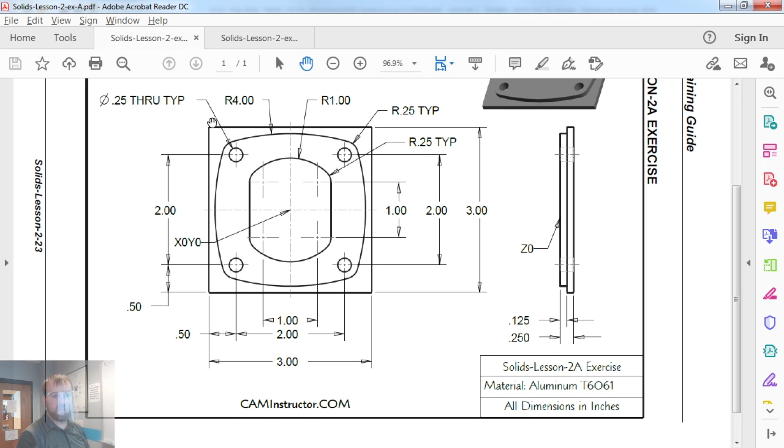Okay. So the first thing we're going to draw, essentially, is the wireframe that would be at the top of the part. Which, on this particular part, would be basically the island here. Right? The top edge of the pocket right here, and the top edge of the holes. The outside of this, this outside base, this is down .125. So we're not going to draw that yet. We're going to actually move everything down .125 and draw it to actually show depth with the wireframe.

All right. So I'm going to start out by drawing a square that is anchored to center. That is 2 inches by 2 inches. And then I'm going to draw a second square that's anchored to center. That's 1 inch by 1 inch. And that's going to give me construction points to then go in and put these radiuses all in. Okay. So I'm going to do a wireframe, create rectangle.

I'm going to go over here and click on anchor to center. And then I'm going to make sure it snaps to the origin. So origin, I turn that on with F9. Make sure it snaps to it and click. I'm just going to drag it out and click out here.

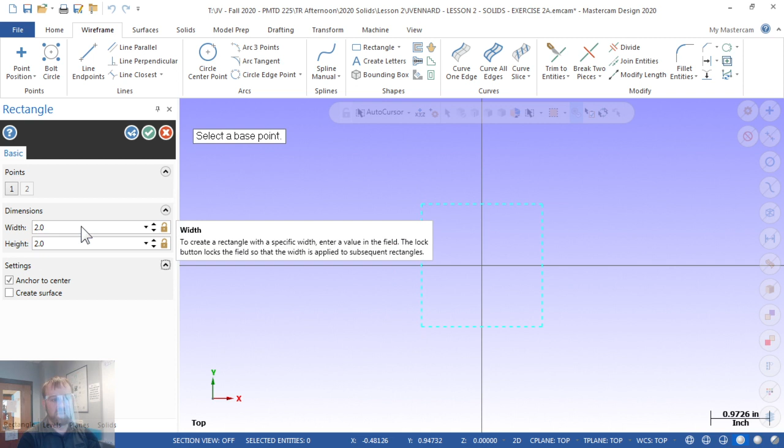Notice mine's dashed right now. I actually switched mine over to the dashed lines for construction geometry. You don't have to do that. I just did it for the other drawing that we're going to do today. It's been like that since yesterday. This one's going to be 2 by 2. I'm going to go ahead and change that back.

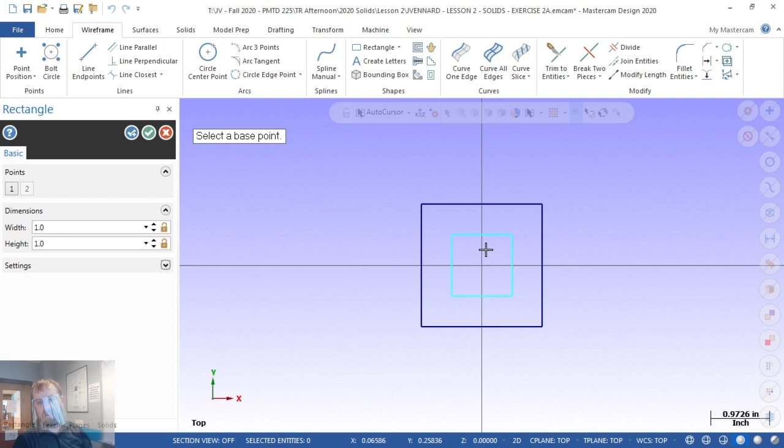Alright, once I've got that placed, I'll hit the enter key to lock it in. And then I'm going to do a second one inside of that. It's going to be 1 inch by 1 inch. And then I'll hit the check mark to lock that one in.

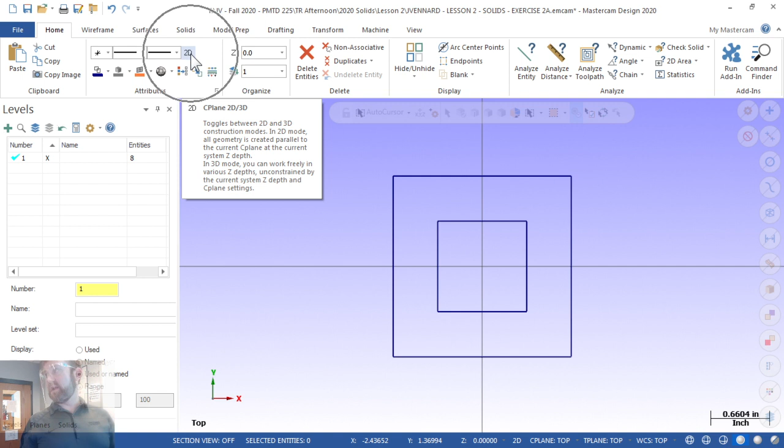One thing I do want to check, because everything I draw right now, I want to make sure it's at Z0. So up in the Home tab up here, right here you see where it says 2D, 3D. Everything I create, I want it to be at the plane that I have set. So 2D is what I'm going to want.

And then I can establish the depth right here by setting my Z depth. So if I have it in 2D right here, and I've got a depth set, everything that I draw is going to be at that depth. That's also in your right mouse button menu right here. Just by clicking on this, I can switch between three-dimensional or two-dimensional. And then I can type in whatever level I want to draw my geometry at right here.

We're going to go to wireframe again now, and we're going to create some arcs. So if I look at this drawing, I see that I've got 1/4 inch radiuses that are anchored to the corners of that 2 by 2 square. I've then got 1/4 inch radiuses that are anchored to the corners at the 1 inch by 1 inch square. So I'm basically going to create 1/4 inch radius circles.

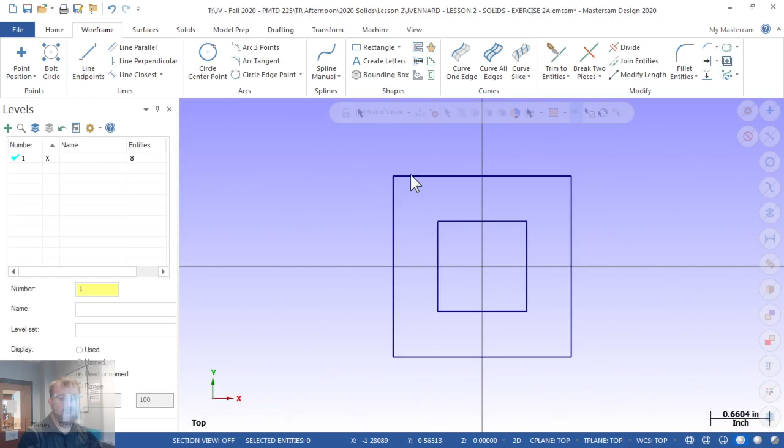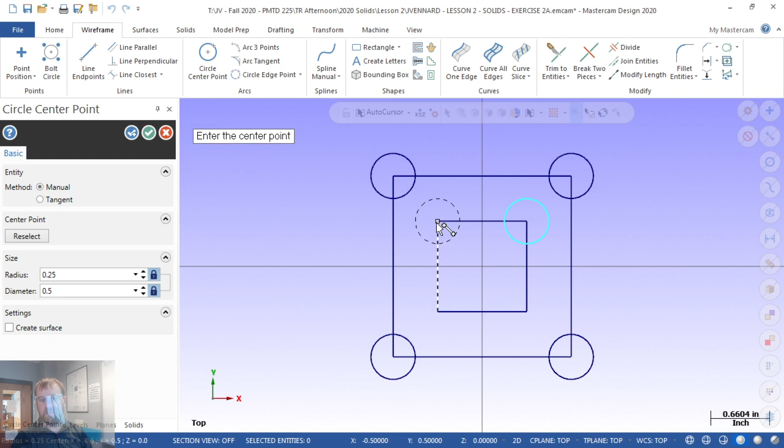So create circle center point. I'm going to make the radius 1/4 inch. I'm going to hit the lock. Then I'll place them here, here, here, and right here. Then on the inside, here, here, here, and here. Once I've created the last one that has the 1/4 inch radius, I'll go ahead and lock that.

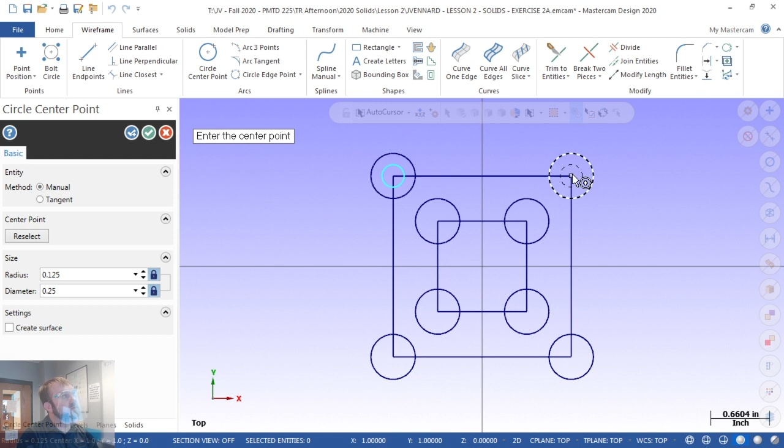And now I can go ahead and create the 1/4 inch diameter through circle geometry. So I'm going to change the diameter to 1/4 inch. And I'll put the little circles here. Okay. I got all that.

Once we get that, I'm going to hold shift down and select these 2 squares because I'm done with them. I don't need to leave my construction geometry on my screen. I'll delete it. The only time you would leave construction geometry on the screen is if you need it to be able to put a dimension there. Okay, just kind of keep that in mind for the drawing you do later. The only time I would leave my construction geometry on the screen is if I need it to put a dimension to.

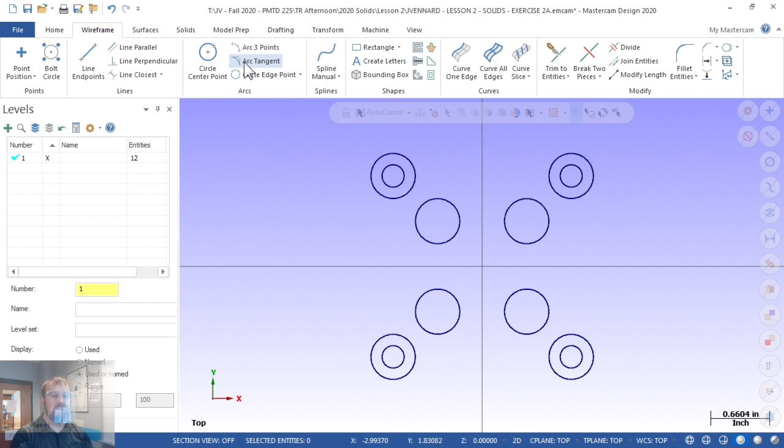Alright, now what we're going to do is put these tangent radiuses in. So these are 4 inch across the outside here. We'll go to create arc tangent. I'm going to set this to a 4-inch radius and hit the lock. I'm going to go from this circle to this one.

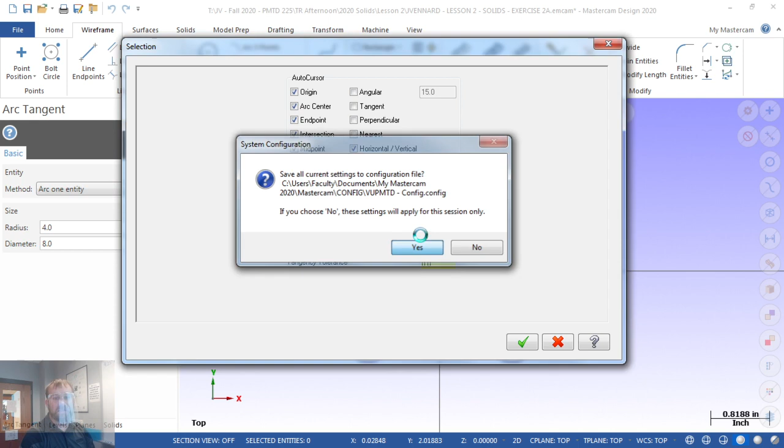Okay. Notice how mine's not snapping to it. I better check my auto cursor. Something must be shut off. Oh, I see now. I see why it's not wanting to snap to it. It's because I had it set to arc 1 entity. That needs to be 2 entities. Now, there we go. Once I went to 2 entities, that made it a lot better.

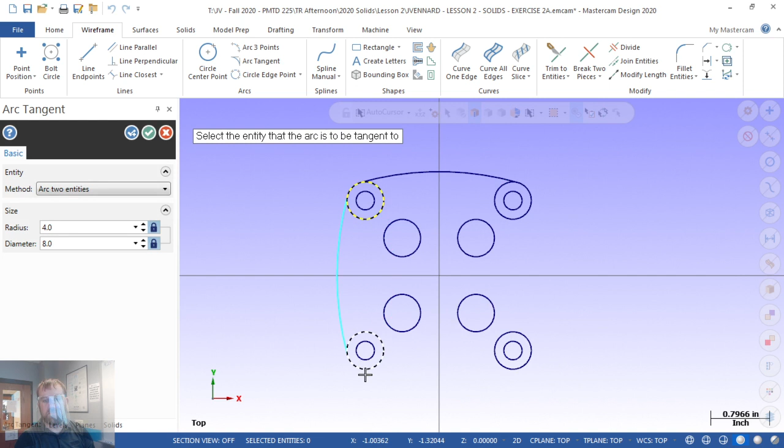I'll pick the one I want to keep. Then I'll go to the next 2. Pick the one I want to keep. Do the same thing all the way around by clicking the 2 that it's going to go tangent to, and then picking the tangent arc that you want to keep. Everybody got all those going around the outside? Okay.

We're going to do a 1-inch radius across the top and the bottom. So I'll switch this over here to 1 inch. And I'll pick these 2 here and what I want to keep. And then these 2 here and the part that I want to keep.

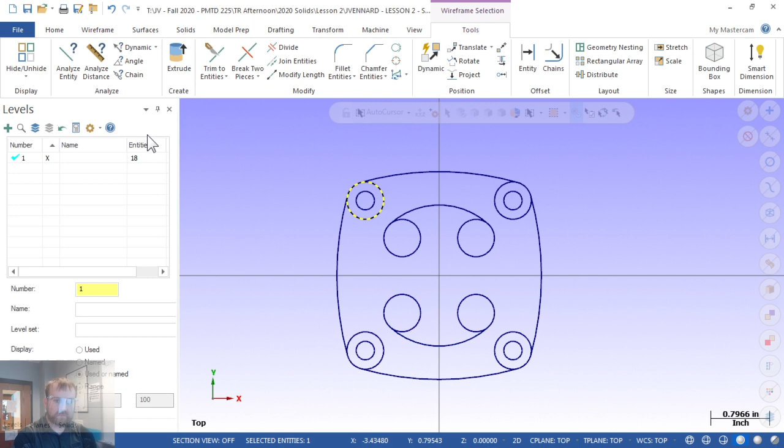Okay, now the next part, this next part here is basically going to be connecting the circles on the outside there. It's basically going to be connecting this and this, this and this. But what's important is that in your auto cursor, you have quadrants turned on, because when you go to create a line, it will let you go to the 0 point on the circle.

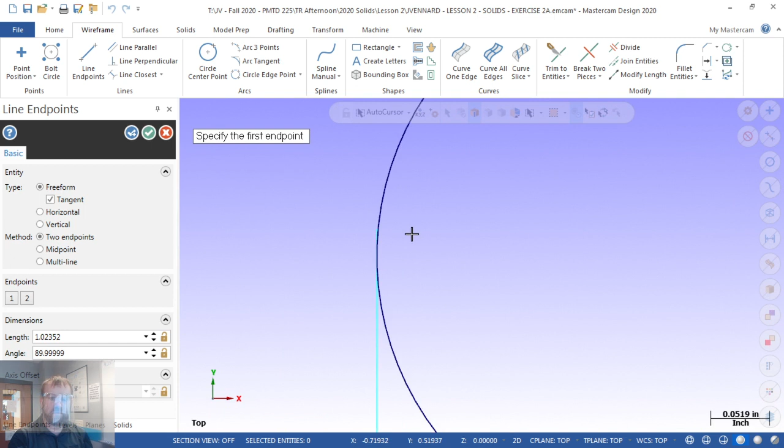But if quadrants is turned off in here, so if I don't have quadrant on right here, when I go to put my line over here at the other side of the circle, notice how it doesn't really snap to it. It's not snapping to the circle at all. And if I draw it up here and just kind of click wherever I think it is, what I end up with is a little piece of line that doesn't need to be there.

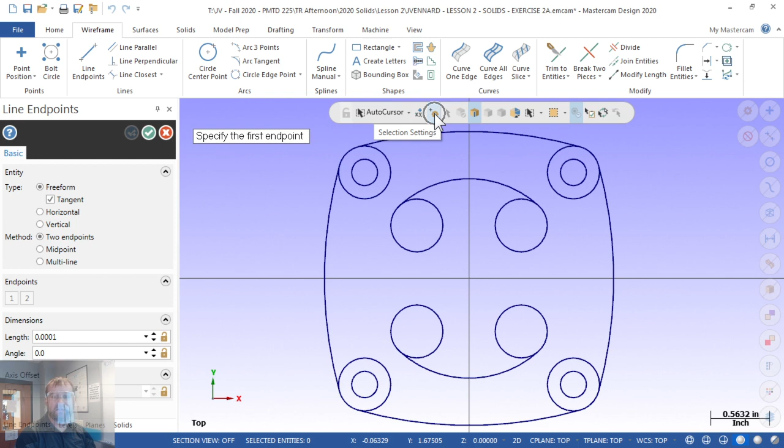And if I'm not paying a lot of attention when I go to trim it later, that can give me a lot of headaches when I go to solid model the part. That little piece of line that's overhanging there, if I don't get that trimmed out later, it can give me some headaches. So what I would recommend is just go to line endpoints, make sure in the selection settings here you turn on quadrants, and then tell it yes there.

Now it will snap to the quadrant here, and then when I come up here, you can see it snap to the quadrant right there, and that way I don't have to worry about trimming that out. And then the same thing over here. Pay attention to the auto cursor. When I see that quadrant cursor icon, I click. Come down here. When I see that icon again, I'll click.

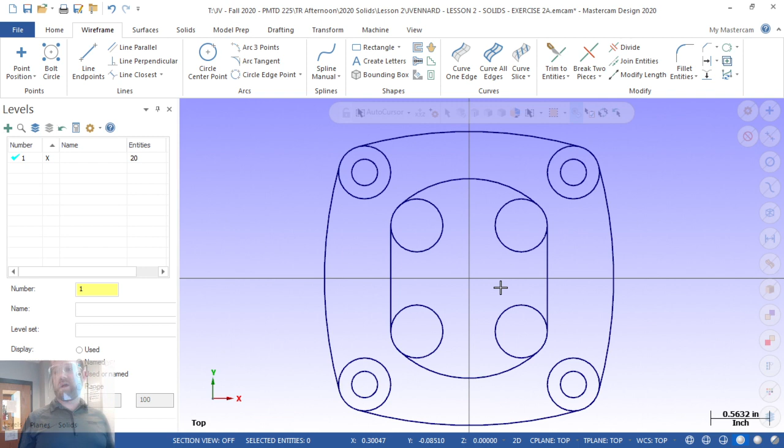So I told you the other day that I use the divide function a lot when I do my trimming. This might be one of those cases where I wouldn't. And here's why. I just want you to watch me for a second when I go to trim this. If you're not really careful when you go trim this, and I trim that out, I got rid of that circle I didn't mean to.

Or, worse yet, sometimes when you go to trim, let me see if I can get one of them to snap to it. Sometimes when I go to trim, I do that, and I think I got it all trimmed out. But if I'm not looking really closely, I end up with this little tail here hanging out. I've got to be paying attention when I trim that none of that's left behind, because when I go to chain that to make a solid out of it, if that little piece is hanging out there, or anything's hanging over, it doesn't want to extrude, doesn't want to create the solid model.

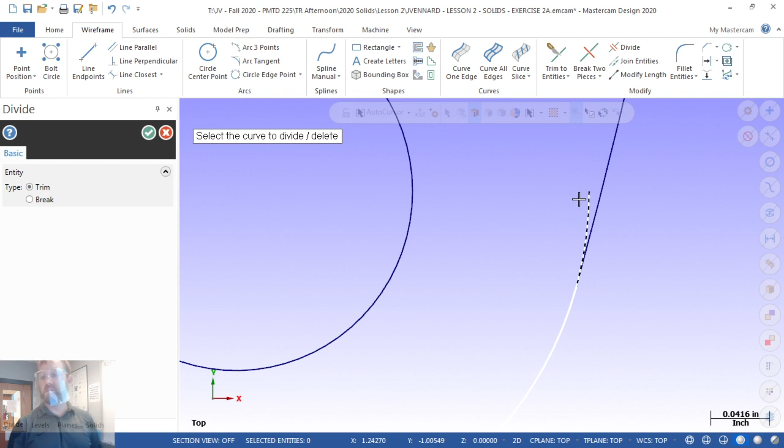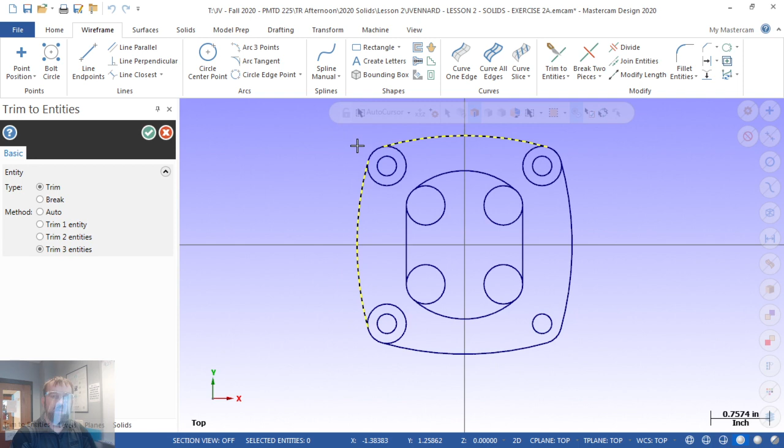So what I would recommend you use when you trim it is go to the trim to entities, and then I would do the trim 3 for this. On the trim 3 you're going to pick basically the 2 outside pieces, so I'd pick this one, and then what you want to keep between the 2 of them. So I'm going to keep this part. The trim 3 makes it to where I don't have to pay as much attention. It's going to trim this one to this one. That one's already trimmed. I didn't mean that.

So this one to this one. I keep this in between them. This line to this arc. Keep this bridge between them. This line to this arc. Keep this piece between them. I just do that all the way around. Pick the 2 outside pieces and the bridge I want to have between them. Okay.

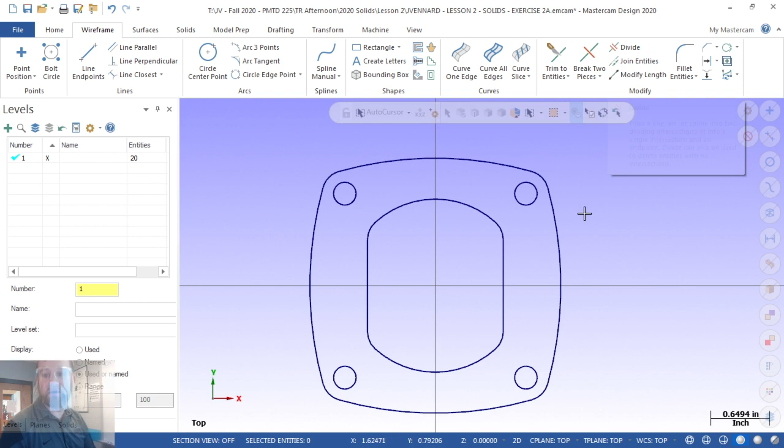A lot of the time, anytime I'm using tangent circles and stuff like that, and it's kind of hard to see, that would be my go-to on the trimming. Like I said, 9 times out of 10 I'm using the divide, but here was one of those cases where I'd probably get away from it, just because you have to really be focused and make sure you don't have anything hanging out there on you.

For some reason it's not taking out that circle. It's just taking out this. Did it? There's one, just clicking on the circle.

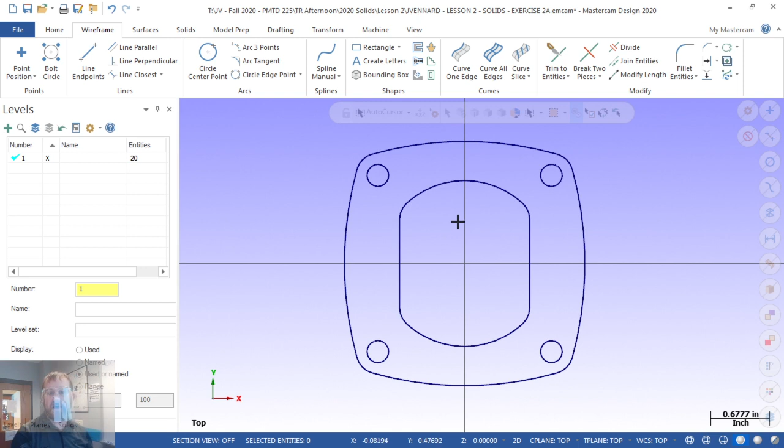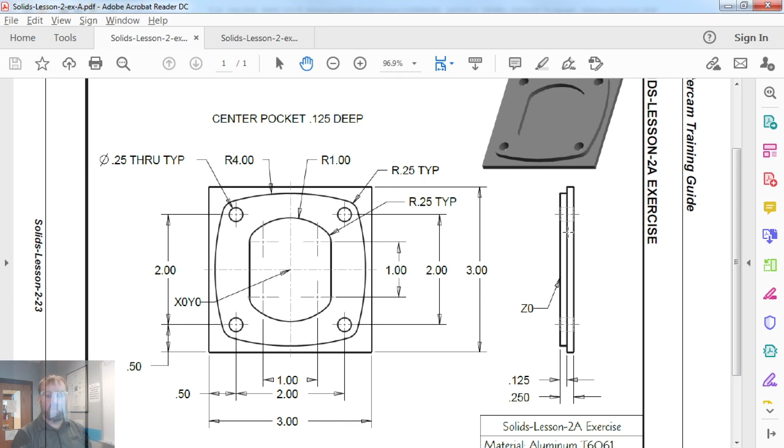Okay. Now that we've got that, we've got the top edge created. So what we're going to do now is I'm going to go to my isometric view, and I want to basically create the bottom part of this edge. The bottom part of this edge is down at 125 thousandths. I want to be able to literally look at it like a three-dimensional pencil drawing, wireframe drawing.

So I'm going to select everything that's on the screen right now. Just going to window around all of it. And then over here, there's these transform functions. These are also in the tools. There's position right here. These are transform functions right here, here, and here. These are all transform functions that are in this same menu.

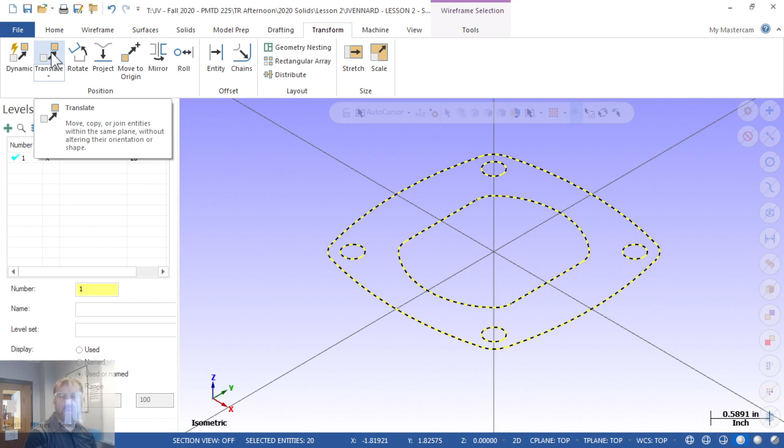The two that we're going to work with today is translate and project. Okay, so first let's go to the translate. Lets you move, copy, or join entities within the same plane without altering their orientation or shape. So basically, you can move them X, Y, and Z, but you can't spin them or expand them or do anything like that, where others you can kind of do that.

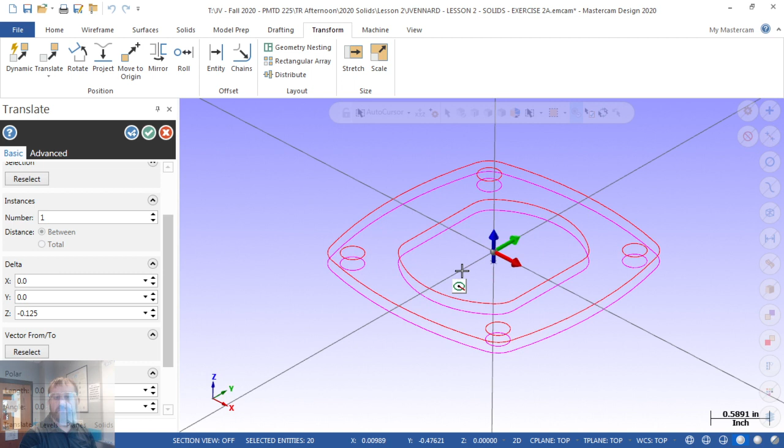What we're going to do is we're going to tell it that we're going to go down negative 125 in Z, and there you see it creates basically a bottom edge. But still, I kind of have a hard time seeing the depth of that. So there's another thing when I'm trying to create 3D wireframe I like to do. Instead of just a copy of that bottom edge, I'm going to hit join here, and join is basically going to create vertices, vertical edges, where all of the top and bottom edges intersect.

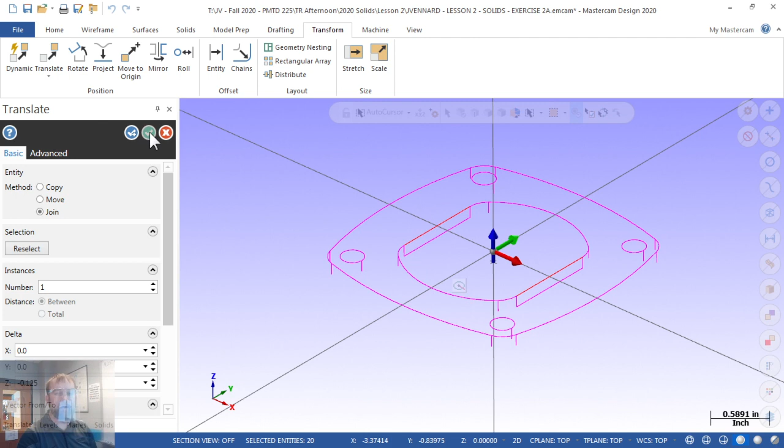Now my preview kind of went away there, but as soon as I check mark out, it should show back up. And now you can kind of see a better 3D representation with the wireframe of that top island on the part. Does anybody have anything they see yet that might be an issue?

Okay. Do those holes only go 1/8 inch? Okay. So I didn't mean to, I windowed around, I wasn't thinking about it, just noticed it. The bottoms of these holes is actually all the way at the bottom of the part. So actually I'm going to go back and get rid of these bottoms here. We'll put those down at 1/4 inch here in a second. Okay, so I'm going to select the vertical line going to the bottom of these 1/4 inch holes in the bottom of it. I'm just going to hit the delete key to get rid of those for now.

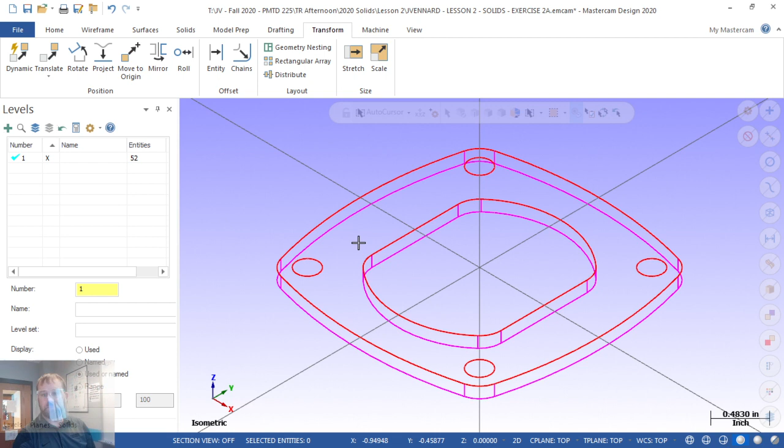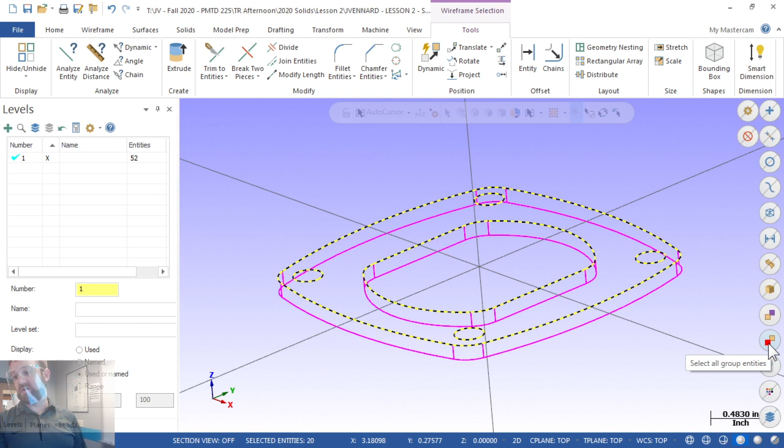Alright, so you can kind of rotate it around. It kind of gives you a little perception of the depth of the part. The red lines that you see, those are group entities. Those are basically the ones that you started with. And the purple lines are what we call result entities. And the reason they're purple and red is because you have these quick masks to where if you want to reselect them real fast, you can click on this little select all group entities and it'll select those, or select all result entities.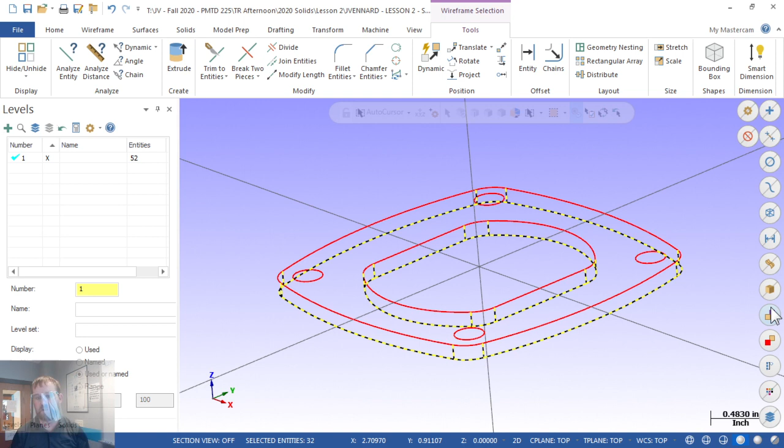Because a lot of times when you're doing transforms, you'll move the geometry and then maybe you'll rotate the geometry. If you're trying to align something with a fixture or a part, a lot of times you'll move it over to get it to the corner, and then you might need to rotate it to get it aligned with like your jaw or your fixture plate, whatever it may be. So that's just a quick and easy way for you to reselect those entities.

Now to get them back to their regular colors, if you right click, there's a little button right here called Clear Colors. You can click on that, or in the Home tab, it's right here, Attributes, Clear Colors. And that will clear those back to your normal default color. Very good. Alright.

Now that we've got that top island drawn, now I want to create basically the top edge of the base. The base is 3 by 3 and it's 125 thou down. So my working depth up here in the Home tab under Organize, I'm going to set the depth to negative 125.

Notice right under that there's this little button, Change Levels. Many of you are going to create drawings for me and you're going to forget all about that they were all supposed to be on different levels. That's the button to hit to move things around. Same thing here. There's your depth and your right mouse button. So here's your change level so you can get organized.

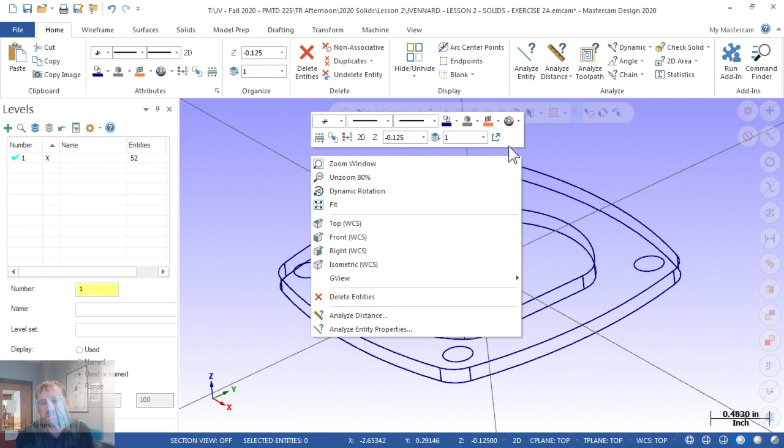Then over here you can toggle and turn on your attributes panel down here if you want it. That way it's always showing up at the bottom of your screen. It used to not be just here in the right mouse button, it was always anchored to the bottom of the screen, and they just changed that to where you can either have it down here all the time or you can have it in your right mouse button menu. So we're going to set that at negative 125.

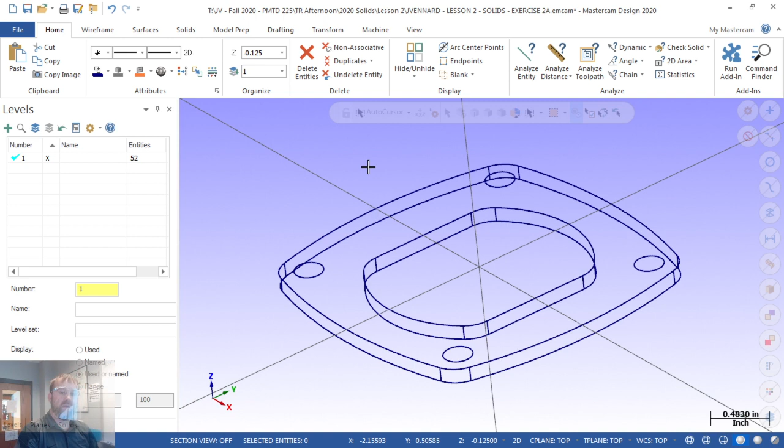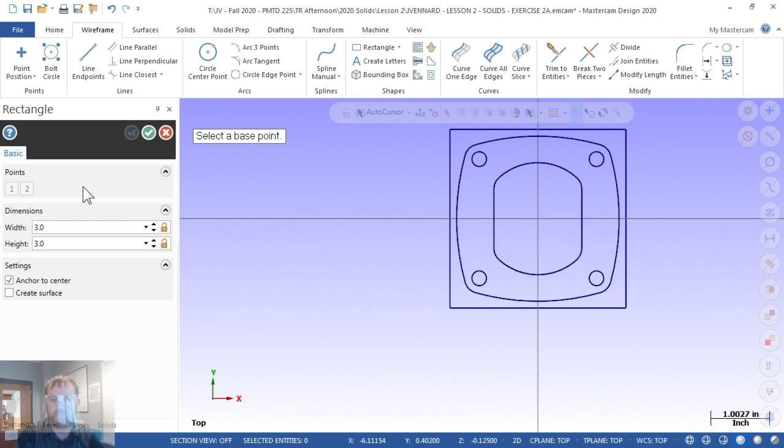Now we're going to draw our next rectangle, which is that 3 by 3, and be careful, make sure you don't get the center of one of these arcs. See how those are snapping? Get the origin, so pay attention to the auto cursor icon before you click. And from 0, 0, we're dragging that out, and we're going to make a 3 by 3 square. Whoops. If you look at that, you see it created it down below at the 125 thou down to represent the top edge of the base.

Okay. All right. Everybody got that okay? You good, Austin?

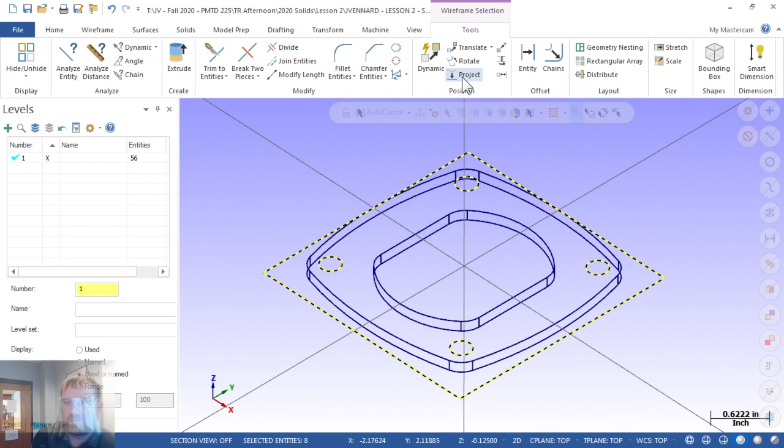and then I can select each of the hole top portions, and then I can go here where it says project. Okay. Now, same thing in the method. You see it's got copy, move, or join. I'm going to do a join. And it says project to. You see you can project it to a specified Z depth, to a plane. If we had planes, we could do that, or to surfaces or solids.

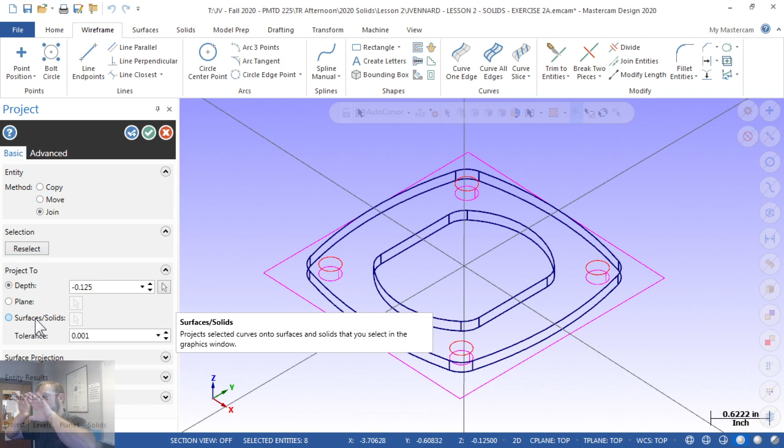So this is what I could use actually to take lettering, for instance, that I want to wrap around a 3D surface. I can take flat lettering and actually project it to a surface and then engrave it on that surface. One of the ways you can do it. There's several ways you can do that, but this is just one.

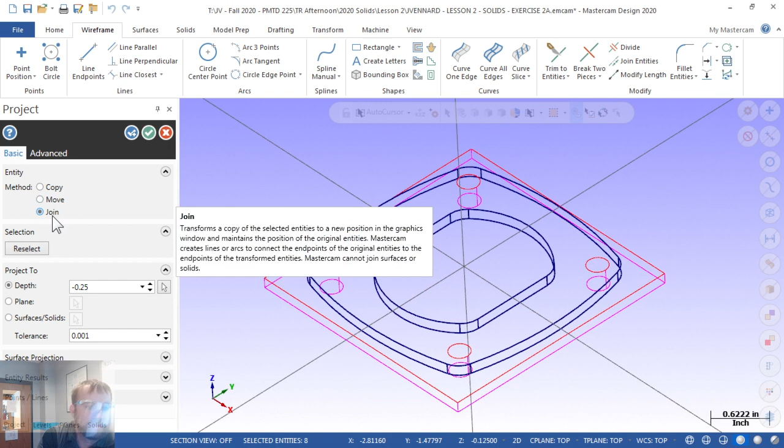So I can take project and tell it negative 1/4 inch, and there you see it takes and projects the bottom of the base and the bottoms of the circles down to the bottom of the part. So I'm on join, my depth's -1/4 inch. And I can hit the OK. I'm going to clear my colors. All right.

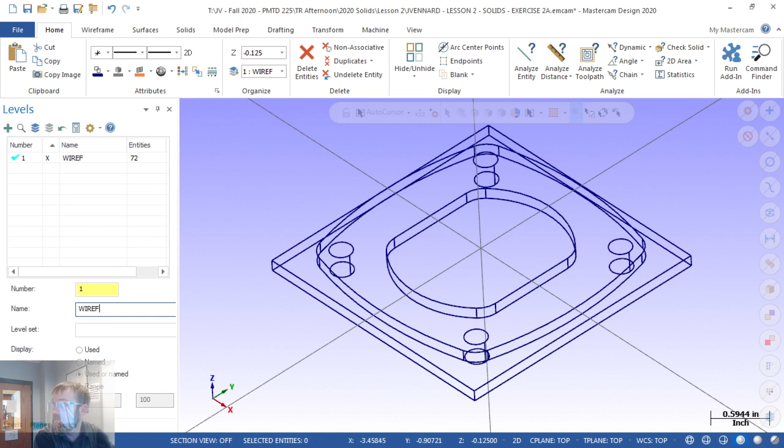Next, we're going to come in here and do our delete duplicates. Make sure we don't have any of that. Does everybody have 72 entities on level 1? Uh-oh. I'm going to name level 1 while I'm thinking about it. Wireframe geometry.

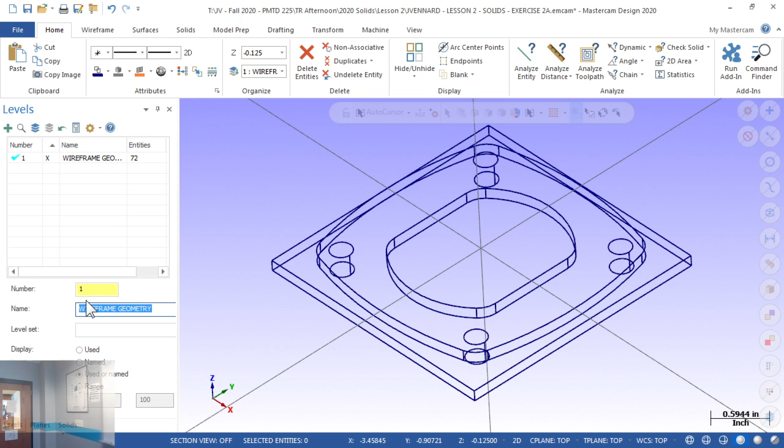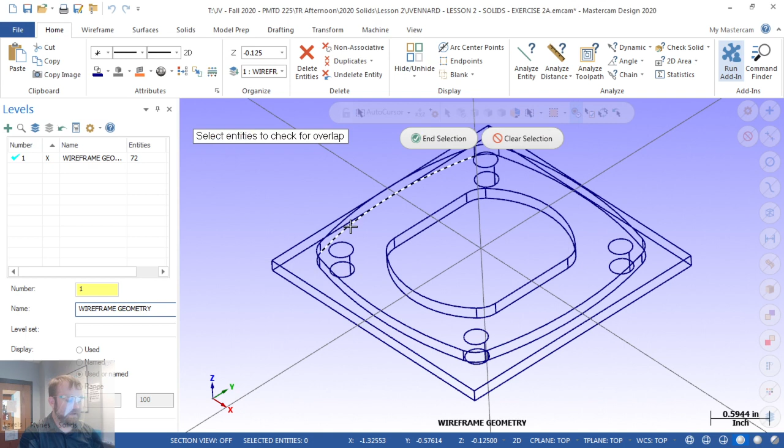Delete duplicates. Then we're going to do the find overlap. Did we talk about find overlap the other day in here? Okay. We're going to do the find overlap. So I'm going to go up to my user applications, my run add-ins, or hit Alt-C to open up the C-hook menu, which is what they're called. Do a find overlap. Select all. So I click in my graphics window and hit Control-A, and no overlapping entities found, which is what I'd like to see.

Uh-oh, what? It says I have 73 entities, but there's no duplicates. Okay. So the what? It should be on your computer. On the home learning edition? It's not on there? What? I didn't know that. I'll have to ask Mastercam. I thought they were on there.

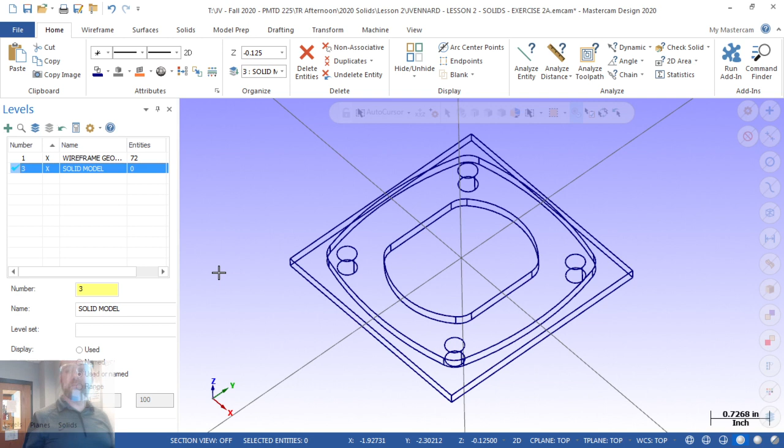Alright, is everybody good? We're going to create a level 3. Call it our solid model. Okay. We're going to do this one just a little bit different than we did before. Rather than do the whole base and then cut everything away, we're going to build it step by step. I got the solid model level ready. Okay. So we'll go ahead and do a solid extrude.

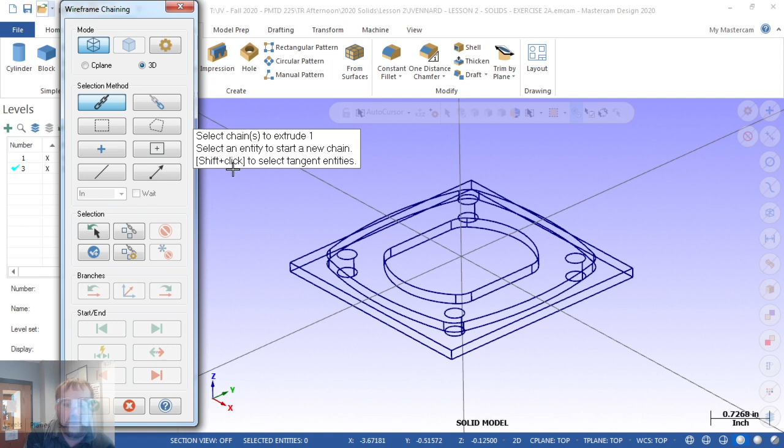Now it's important that I'm in C-plane this time, because if I go with it in 3D now, since we've got those joined edges, if I go 3D and I click on this, you see when it gets to one of those points where it can either go down in Z or keep going around the part in the C-plane, it says which way do you want to go, and I got to sit here and click the arrow and tell it where to go each time. And I can make a real weird chain just by telling it the wrong direction.

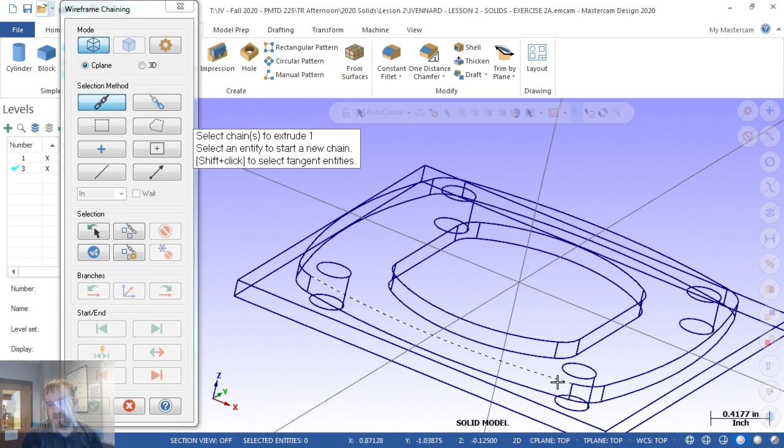If I put it in C-plane, I can click this top edge, which is what I want y'all to do. Click the top edge here. And then we're going to click the top edge of the pocket right here. Okay. So we're going to click that top edge out here of the island and the top edge of the pocket, and then we will check mark. Okay. Now I'm going to call this the island with pocket.

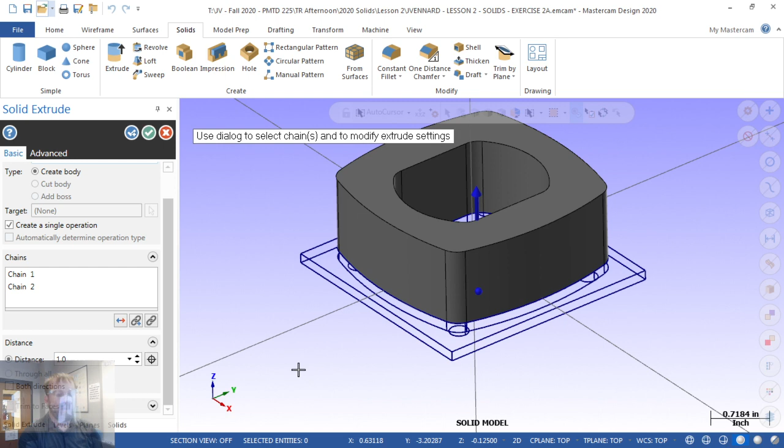And now I'm going to use a little bit different function. Rather than dragging it and flipping the arrow and stuff, I'm actually going to go right here. There's a little crosshair looking icon. It says auto cursor returns you to the graphics window to select an auto cursor position. So basically what that means is if I click on that, I can zoom back in on this and let it snap to somewhere on the bottom edge here.

As long as it snaps to one of these bottom edge points and I click, it will automatically flip it and set it at the distance that I want it to go. Just basically pulls the direction and the distance out of the graphics window from our wireframe that we created.

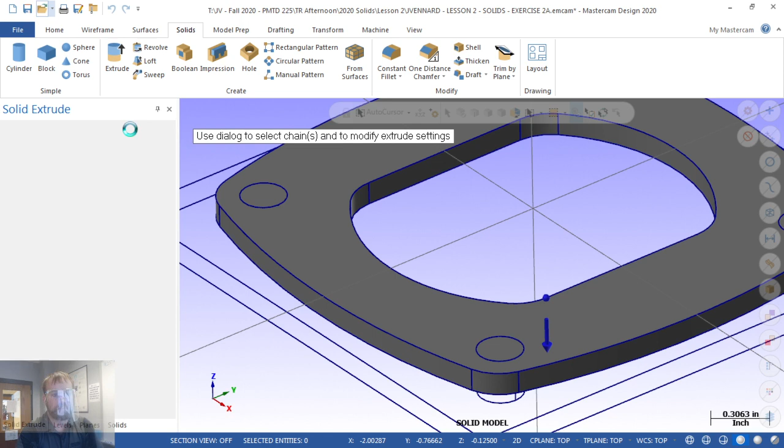Once I've got that, I'm going to hit OK and create new operation. Once again, I'm going to go to C-plane if it's not defaulting to it. And then I'm going to chain my base out here. Okay, so I went to C-plane. If you get the wrong thing, just hit the unselect, which is the U key, and click this out here.

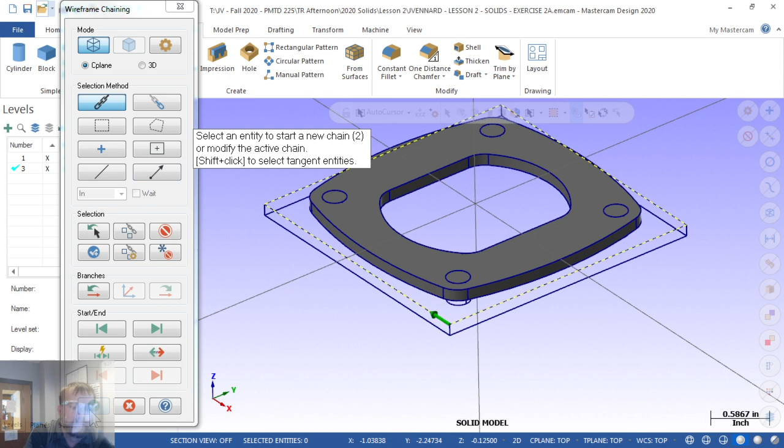All right, now, very important. This is our base part, but it's very important that we don't leave it on type create body, because what that's going to do is create a second solid altogether. They're not one entity. Anytime we're building a solid model of one part, I want it to be one entity. So we want to make sure we switch that to add boss.

Notice here it's got target, but the target is grayed out. Anytime there's only one other solid for you to target, it leaves it grayed out. But if I had several solids on the screen, I'd have to pick which one I'm adding this to. Which one's it intersecting? It could be intersecting multiple solids. I'd have to pick which one was my target solid.

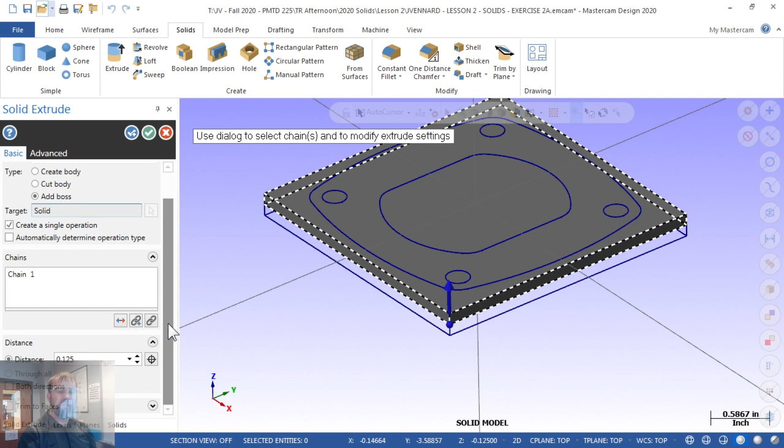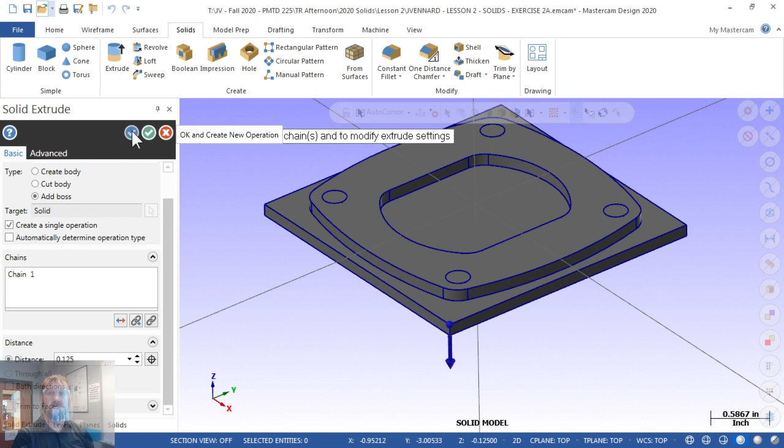And then once again, I can pick the little auto cursor crosshair. I can pick this bottom corner down here and it flips that part around and does it that way. And I can tell it OK and create new. Actually, I'm just going to tell it OK. If you already hit OK, create new, just hit escape.

Does everybody have this much? All right, now you got this much over there. Good. All right, now just for fun, we're going to use the hole feature.

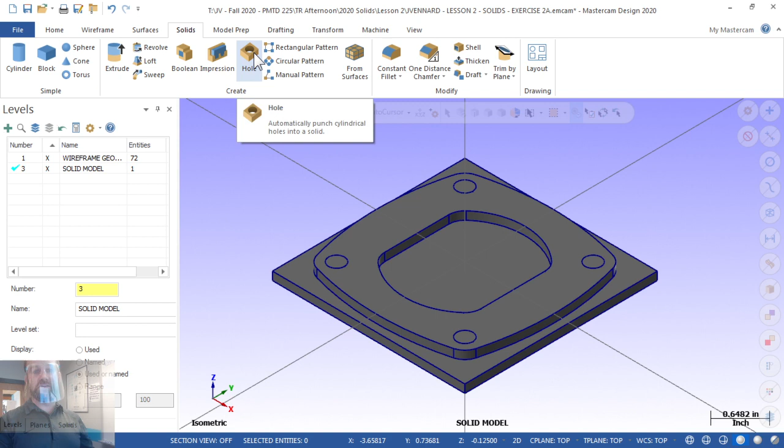We're going to use the hole feature where these are just normal through holes, simple holes. So the extrude would have worked there too. We could have hit OK, create new, chained them. But if we didn't have the geometry for some reason, we could use this hole feature right here. We can name these the 250 through holes.

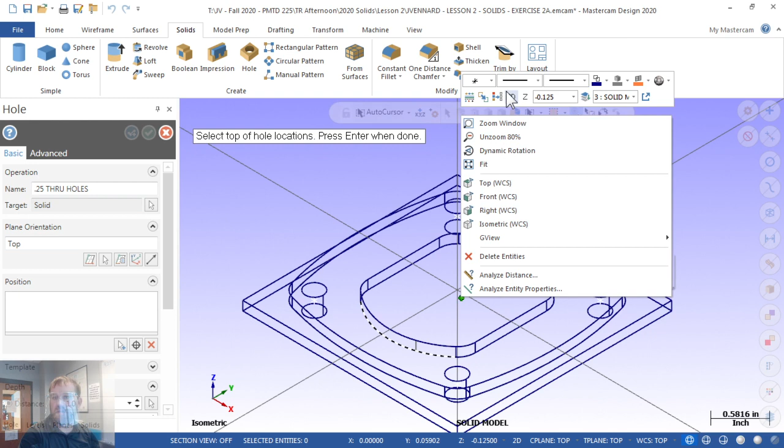Okay. Now, when I clicked, it didn't really show anything. See how those are down 125 thou? That's because I'm still in 2D and I have it set to negative 125 thou. And if you're going, how did he just shut the shading off? I hit Alt S and that shut the shading off on my solid.

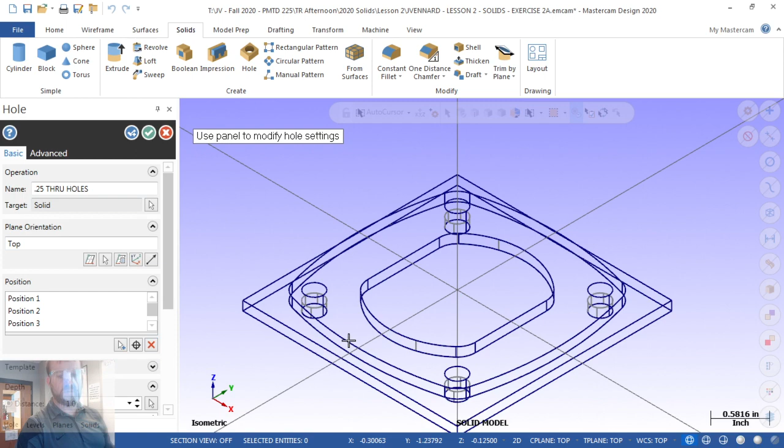Could have also, when we did those, because look where it's going to want to drill those from. See where they're at down in my part? So I don't want it to do that. I'm going to go right here and hit remove all. So I hit enter and it's showing me that it's drilling them from inside the part. Hit remove all. And then I'm going to hit add position.

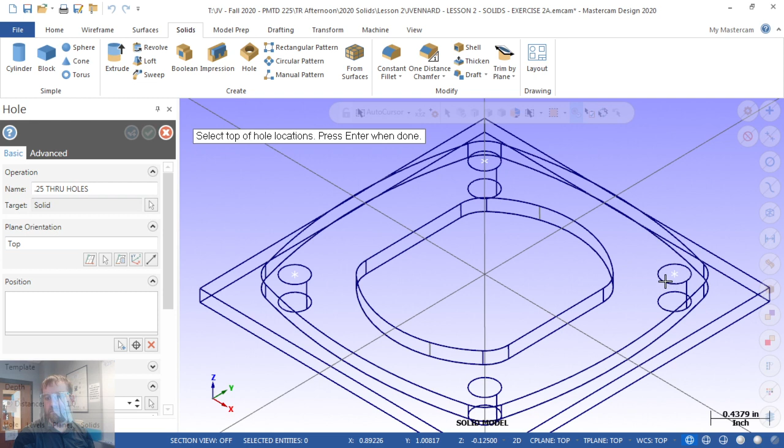And then I'm going to pick the circles at the top edge of the part. I didn't think about the auto cursor being constricted to the 2 dimensions. So once I pick the tops of the circles, there we go. Now it's going to cut the holes from the top of the part. Now, these holes are not constrained to that wireframe, just the position of that wireframe, the center of those circles.

I mean, I could change the diameter dynamically right here of these holes by typing in a different diameter. Okay, I can modify that in the chart down here.

And the best part is, if I needed a hole with certain features, a 1/4 inch hole with a 10 thou per side chamfer at the top, I could go here and tell it to countersink this and tell it that the countersink diameter is 270, and it will put the countersink on top of it for me, so I can graphically see that without having to go in and do it with the chamfer operation or something else.

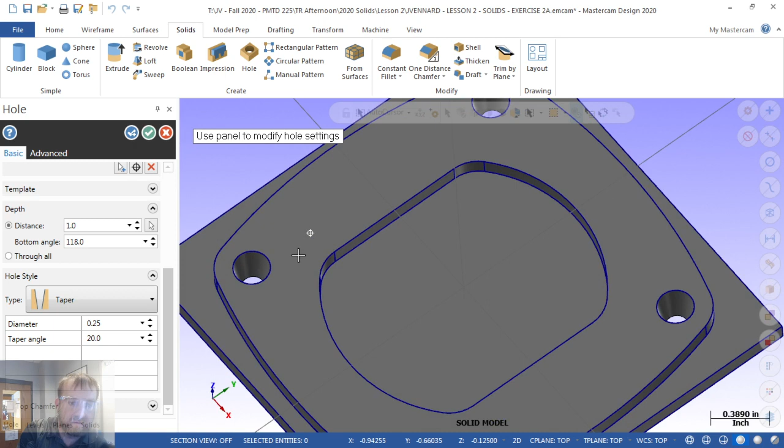For us, these are just simple holes for now. Obviously, you saw counterbore, countersink, counter drill, and tapered holes. You could do a tapered hole if this thing had a 20-degree tapered angle. You can see it'd be like a tapered hole there, getting smaller to the bottom. Oh, yeah, negative doesn't work. You'd have to cut it from the other side if you wanted it to taper to the top.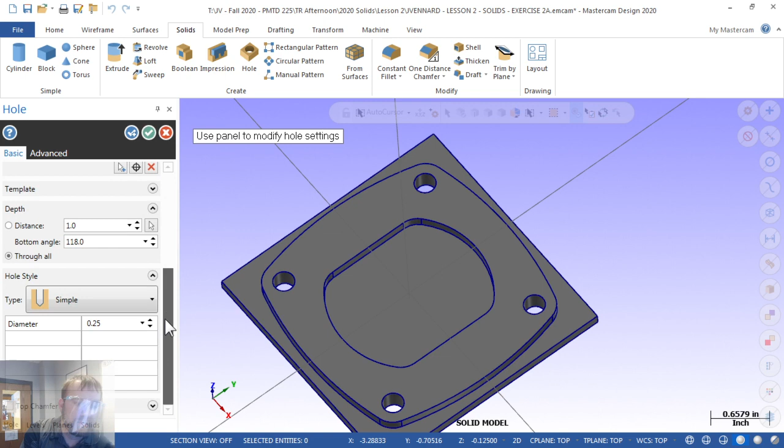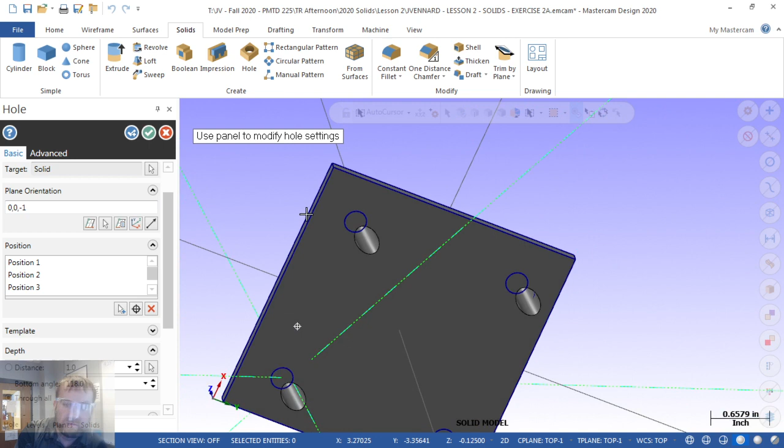So we're just doing a simple hole through all. Like I was talking about, you don't have to do this, but I'll show it to you. I could take this gnomon, okay, and put it here and do something weird like this, like rotate it up and around. And then when I check mark, my holes are cutting at some funky angle here through the part. Okay, just by taking and spinning it and moving it to a different angle.

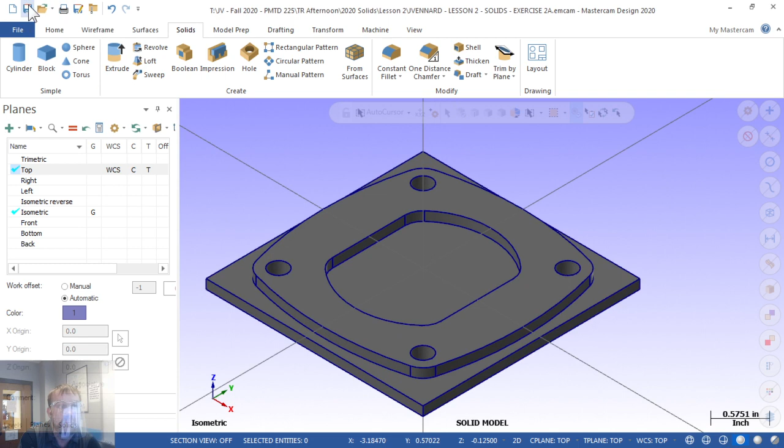Okay, so now we've got this solid created. If I look at my solids, I see the operations where the island, the base, and the through holes are there. In my levels, I can take a look and I see that I've got 72 entities on level 1, one on level 3, which should be always, anytime we're doing these drawings for me, level 3 for right now is going to have 1 entity on it. Everybody's good? All right.

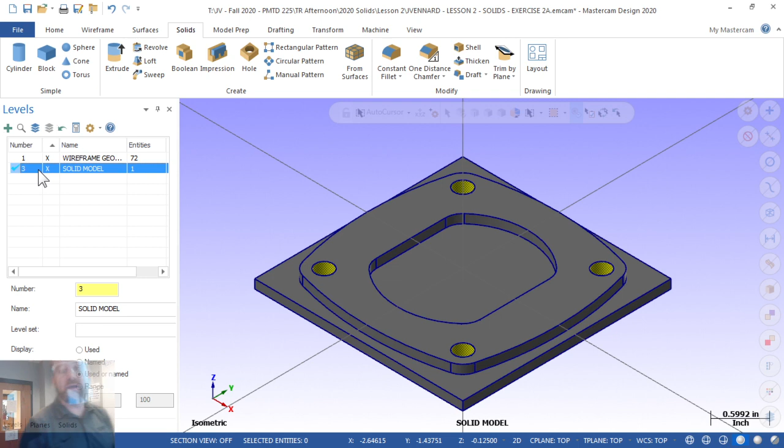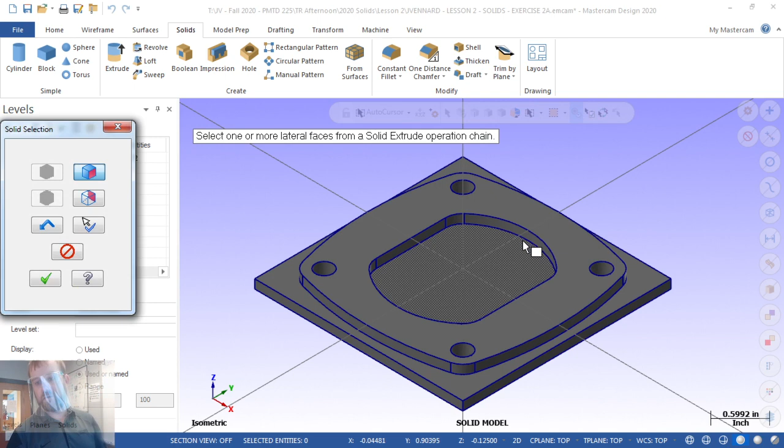A couple of the other things. While you draw it, we can go to drafting. Now, one thing on this one, not drafting, sorry. In solids, we go to draft. On this one, for some reason, the draft extrude, because of the way we built the model, because we built it tiered instead of cutting it out of a solid block, when I go to do a draft on this inside wall, it throws up this parasolid warning, and it doesn't want to draft using that feature. But what we can use is the draft faces,

and I can pick this inside wall. I can tell it that we're going to this bottom face here. Okay. Oops. Reference face needs to be the top face. That's what I want to draft from. Then I can put my angle in here. Okay. The reference face needs to be wherever you're starting the draft from, and it will let me put a draft on the inside of that pocket if I need to.

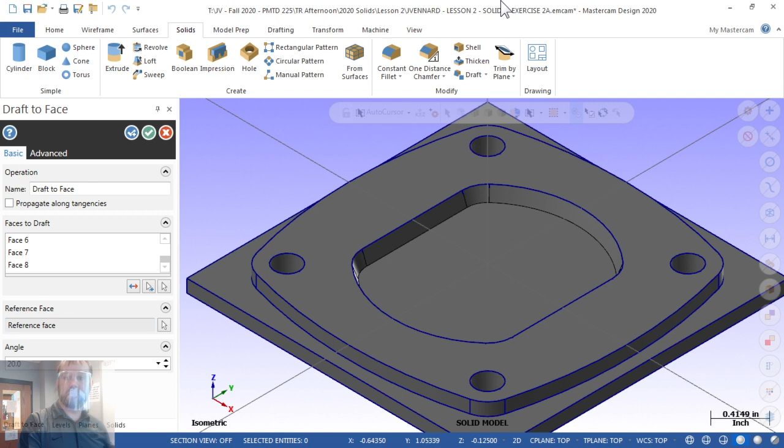And that's just one of those little quirks. Sometimes you can go back and change the way you modeled it, and it would fix it. But there is another option there. You can draft faces and then pick the edge you're drafting from. The outside does work just fine, so I'm a little confused why it got a little upset the other way, but it will draft on the outside using the extrude.

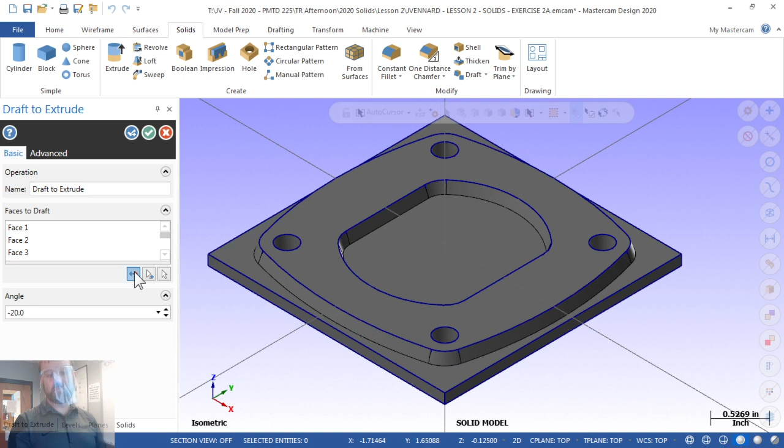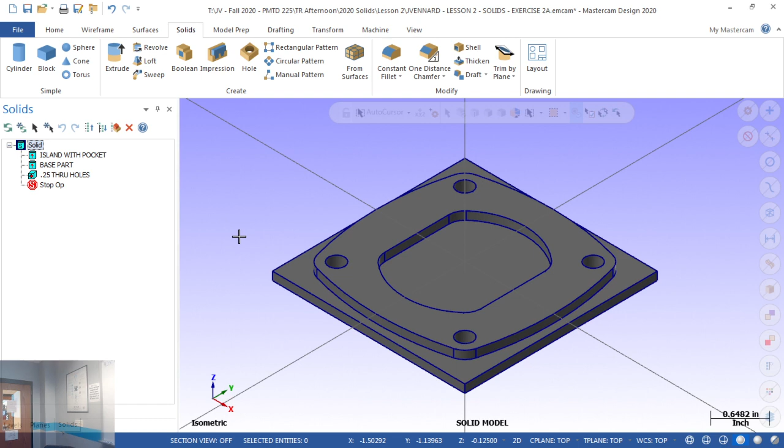Alright, has everybody got this thing drawn? Yep. I was just showing the draft. I just took the drafts back out of there. I just wanted to show you that sometimes you have to use one of the other ones. So, okay.

So here's what you're going to do with the rest of your time, and you have plenty of time to get a really good start on this. Probably, okay. Some of you might even get it done. You're going to take this drawing and this drawing that we did the other day. Save this. Okay. You're going to take these two drawings, you're going to add a level 2 to them, and you're going to dimension them. Okay, and you're going to make them match the prints. You make them match the prints and dimension those.

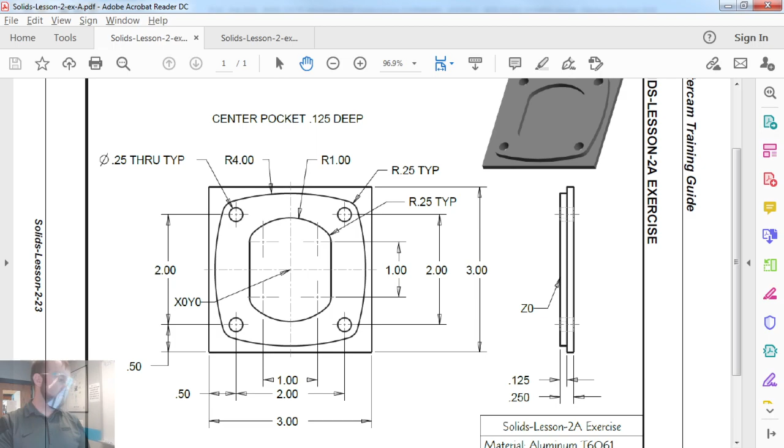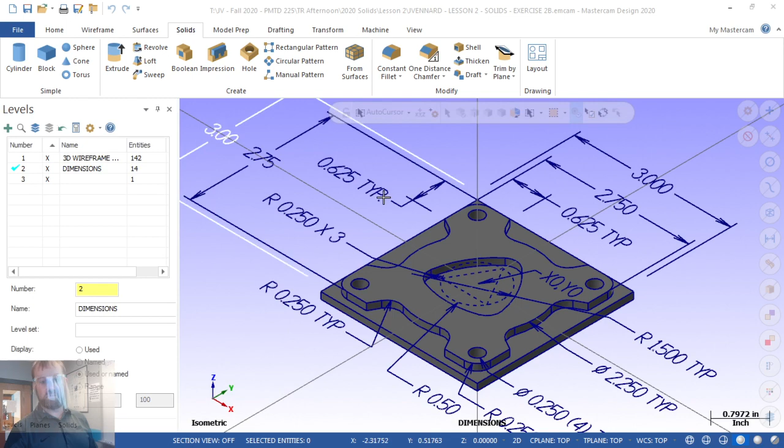And then you're going to draw, dimension, and solid drawing 2B. Which is this one right here. Now I need to show you something because we haven't stepped into this yet. Notice here in the center I put some construction. Like I was saying, I added that to have something to dimension to. I left those in there and made them the construction style lines. That way I could dimension this circle here.

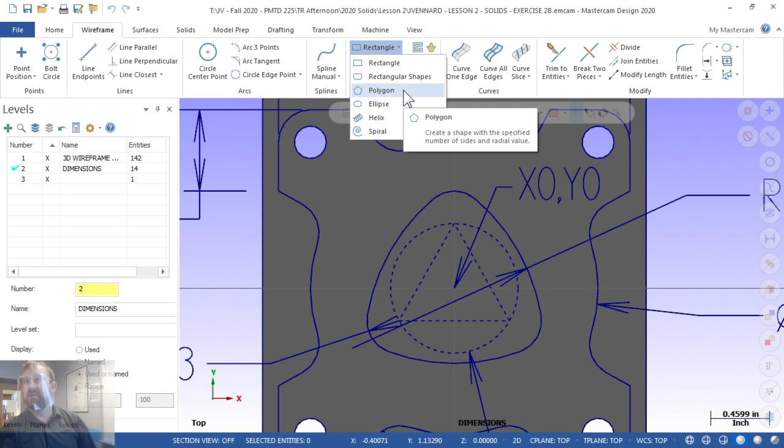See the triangle. I didn't do any crazy trig to create that triangle. I went into Wireframe, and underneath rectangle there's a create polygon. Okay, and you can create a triangular polygon by just telling it 3 sides, and then you pick where you want it to go to. You can rotate it if you need to, and you tell it what the inscribed, or out to the flats, or what I call the inscribed circle would be of that triangle. Okay, so that's how that's created with the create polygon underneath the rectangle drop down.

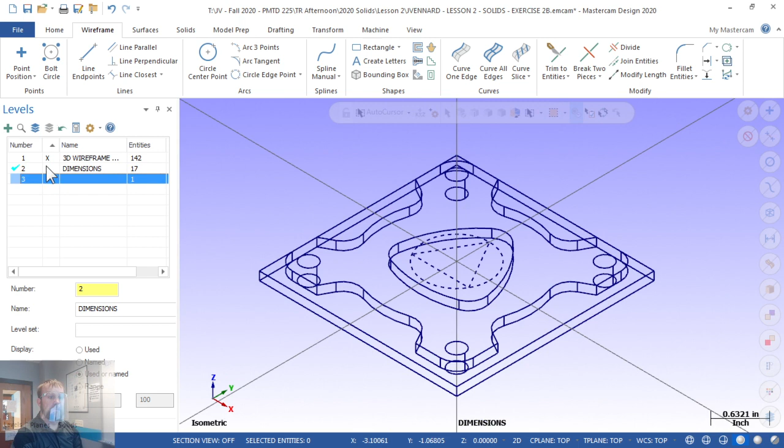Okay, so what you're going to do, as you can see here, you're going to have 3D wireframe on level 1, dimensions on level 2, the solid model on level 3. And that's what you should have for all 3 of the lesson 2 drawings for me for next Tuesday. You got the rest of the time today to work on it. Questions? All right. Have at it.